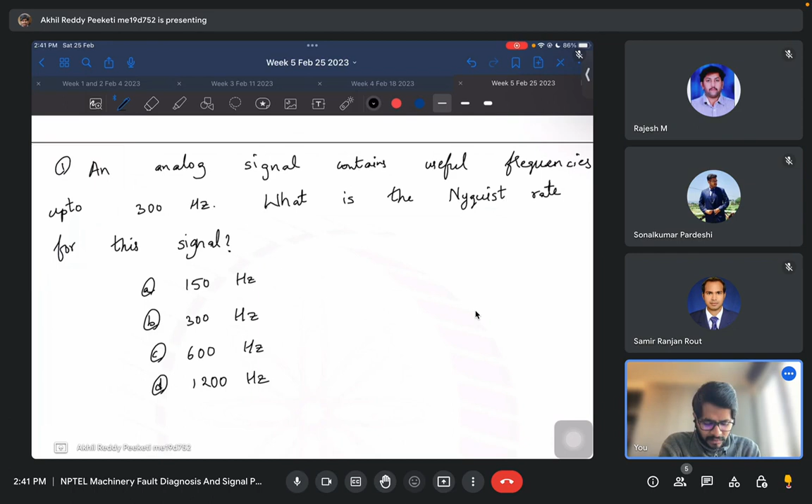So the first question: an analog signal contains frequencies up to 300 Hertz. What is the required rate of sampling for this signal? Can anyone give me the answer? This is one of the questions we have seen multiple times in the last weeks.

We have frequencies of up to 300 Hertz. So what should be the Nyquist rate? Nyquist rate is basically the sampling rate. What is the advised sampling rate for this case? Yes, 600 Hertz. So if the maximum frequency available is 300 Hertz, then you should sample at least 2 times the maximum frequency, right?

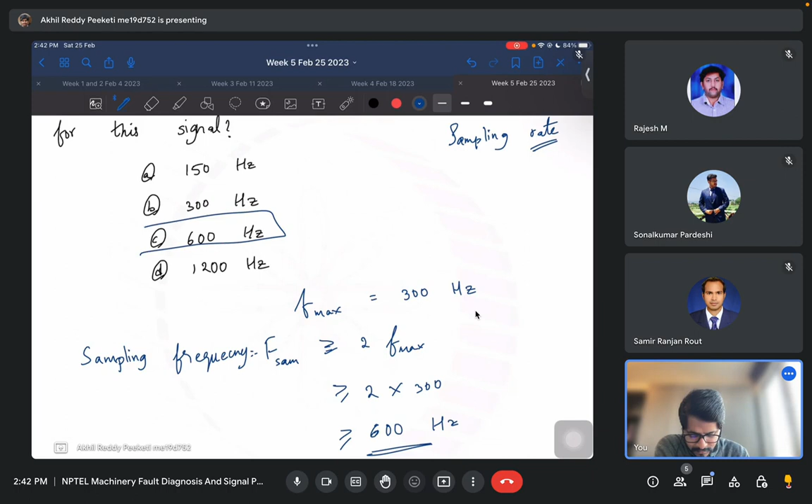600 Hertz. You can actually sample it at 1200 Hertz also, but the Nyquist rate corresponds to the minimum frequency at which you should sample. So here the answer is 600 Hertz. Even if you sample at 1200 Hertz, you will still be able to track all the properties of the signal, but you don't need to do it at that high frequency. If you just do 600 Hertz, that's enough.

That is for this question. I hope this is clear. So let's look at the second question.

An analog signal has useful frequencies of up to 240 Hertz. Suppose we sample at a rate of 600 samples per second. What is the highest frequency that can be represented uniquely? So we have a signal which has frequencies up to 240 Hertz, but we are sampling at 600 samples per second. Is that enough? 600 samples per second for 240 Hertz? Following the Nyquist rate or the sampling rate we know, is that enough?

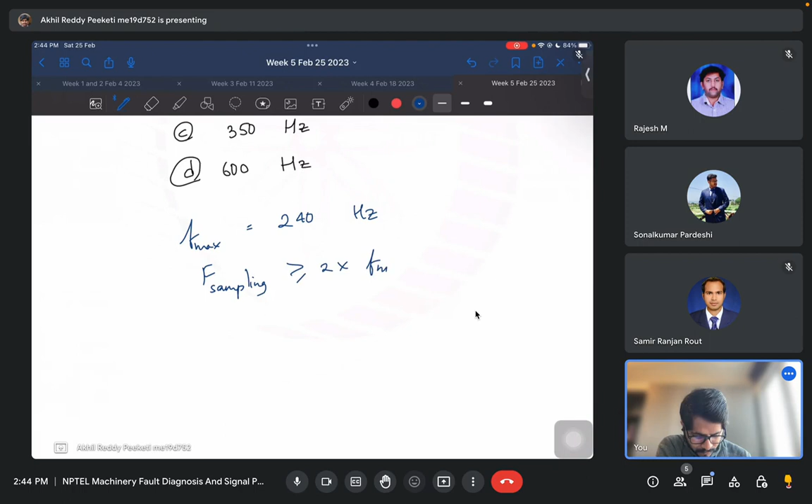You can unmute and answer anyone. For a frequency of 240 Hertz, is sampling at 600 samples per second enough? You need to sample only at 480 Hertz, that should be enough, but you are sampling at 600. So it is enough, right? 600 is greater than 480. So if you sample at 600 Hertz, that should be enough.

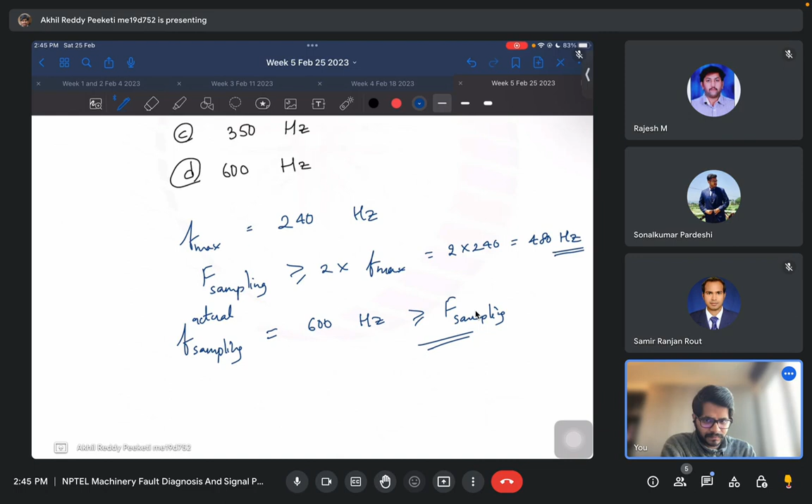Now let's say if you are sampling at 600 samples per second, what is the highest frequency that you can actually represent uniquely? For this sampling rate, what is the highest frequency possible? Any answer? So you are sampling at 600 Hertz. So anything up to 300 Hertz, 600 by 2 Hertz, you will be able to track, right?

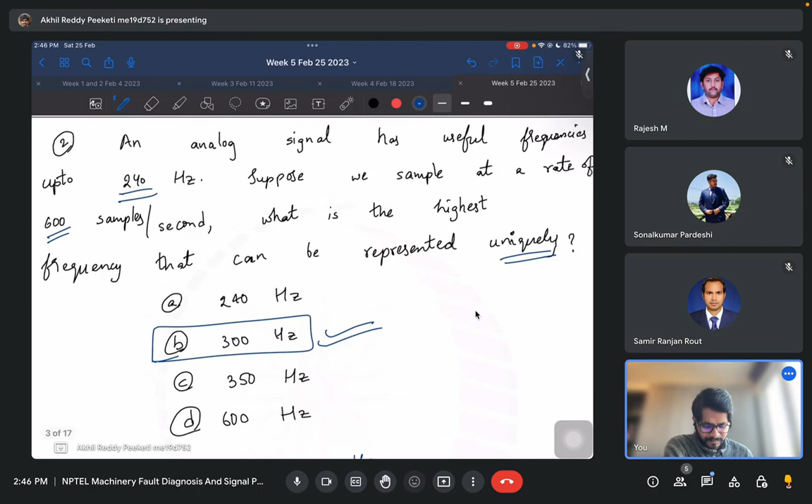Is this clear? Is this question clear? I hope so. So here this 240 Hertz data is just to deviate you from the correct things. The question is, what is the highest frequency that can be represented if you are sampling at 600 samples per second? So if your sampling rate is 600, then the maximum frequency you can get is half of the sampling rate, so 300 Hertz. I hope this question is clear to the others also.

Now let's move to the next question. Here we have a handheld accelerometer calibrator that provides 20 meters per second squared of peak vibration in terms of acceleration at a circular frequency of 2000 radians per second. Calculate the linear frequency and RMS amplitudes of velocity and displacement.

I'll wait for 1 or 2 minutes for all of you to read the question and understand it, and then I hope one of you can explain what we should do here.

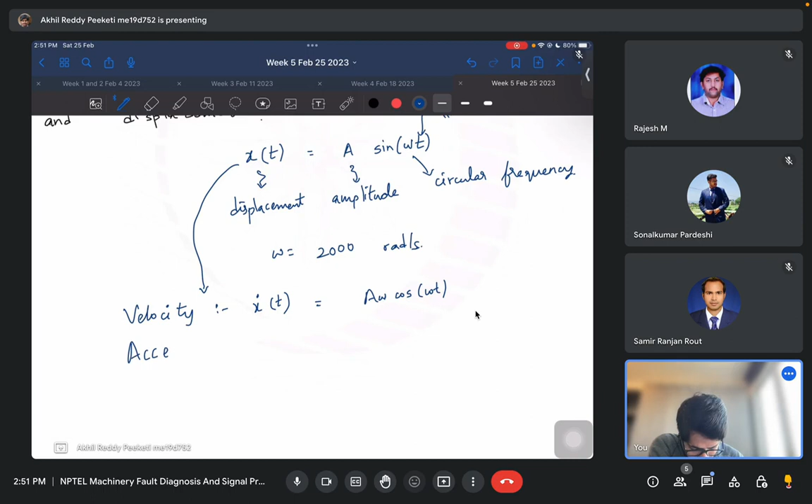If you do first derivative with time, then you will get velocity: A sin derivative is cos omega t, omega will come. And acceleration: cos derivative is minus sine, and omega will come again. So this is the acceleration amplitude, this is the velocity amplitude.

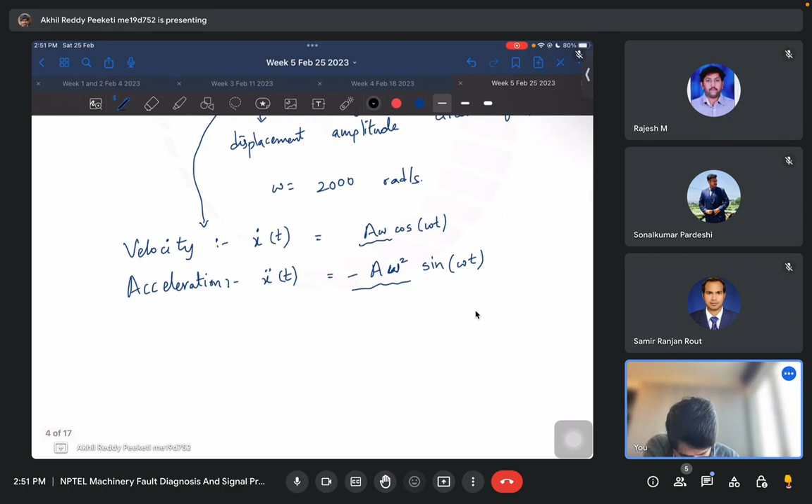Let's write those. Velocity amplitude would be A into omega, and acceleration amplitude would be minus A omega square, but if you are looking at the amplitude, only the magnitude is enough. So A omega square.

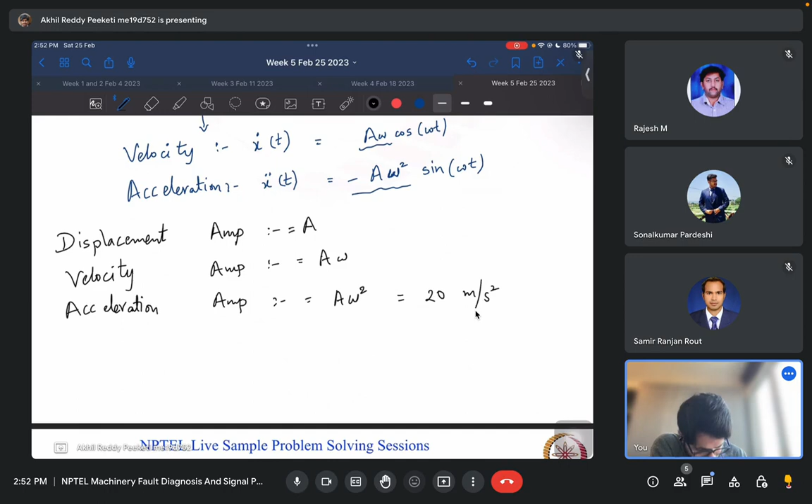Now they have given us the amplitude or the peak for the acceleration, so that means they have given us this. So we know omega and we know A omega square. So then can we calculate A? We can, right? So A omega square is 20 meter per second square

and A omega is 2000 radians per second. So A into 4 into 10 power 6 — radians squared is dimensionless, so second square gets cancelled. A is equal to 4, 5s are 20, so 5 into 10 power minus 6 meters. So A is equal to 5 micrometers. Now we got the displacement amplitude here.

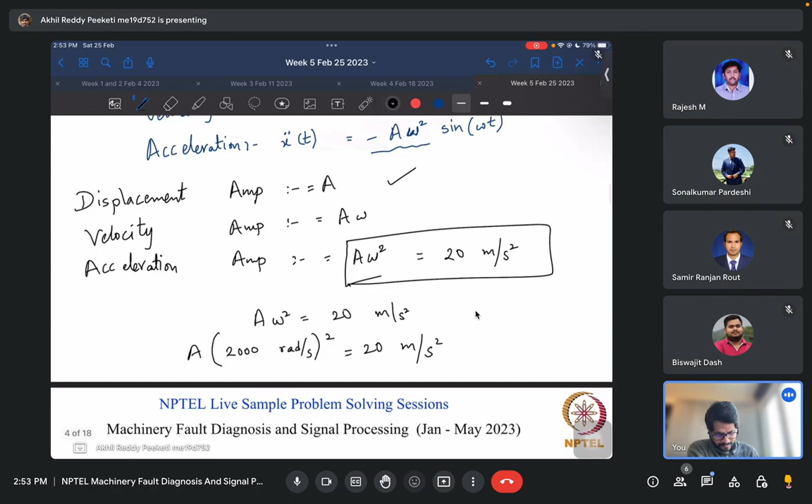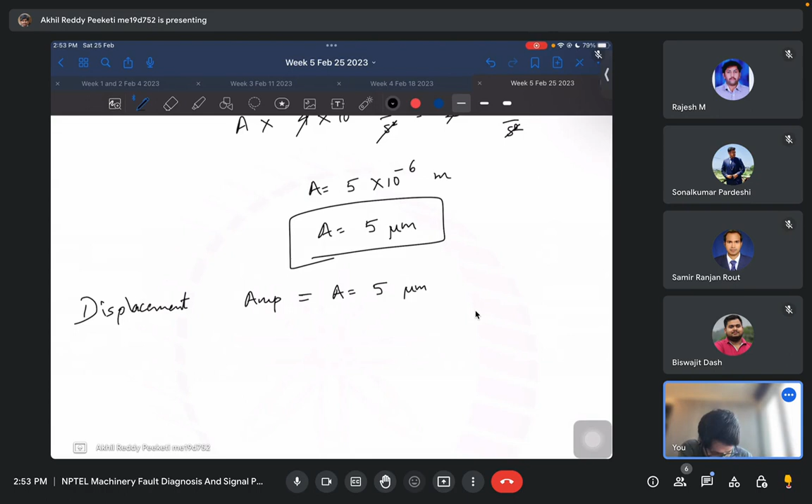What are we asked? We were asked to calculate the linear frequency and the RMS amplitudes. First let's calculate the normal amplitudes. Now we got the displacement amplitude, what would be the velocity amplitude? A omega, right?

5 into 10 power minus 6 meters into omega is 2000 radians per second. So 5 2s are 10, 10 power minus 6 into 10 power 3, so 10 power minus 3, so 10 mm per second. So we got the displacement amplitude and the velocity amplitude.

And first thing is linear frequency. So how is circular frequency and linear frequency related? The circular frequency is equal to 2 pi f, right? So this is circular frequency and this is linear frequency.

So f is equal to omega by 2 pi. Omega is 2000, by 2 into pi is equal to 1000 by pi, so some 318 point some hertz. So this is the linear frequency.

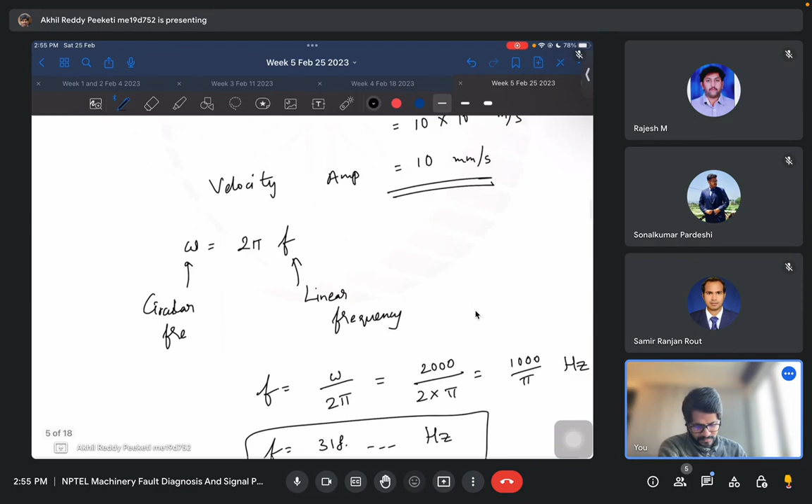Now we want the RMS amplitudes of velocity and displacement. So you know the amplitude, so what would be the RMS amplitude? Yeah, exactly. So RMS of displacement amplitude would be A by square root 2.

So 5 by square root 2, it's around 3.536 micrometers. Now similarly, RMS of velocity amplitude would be A omega by square root 2.

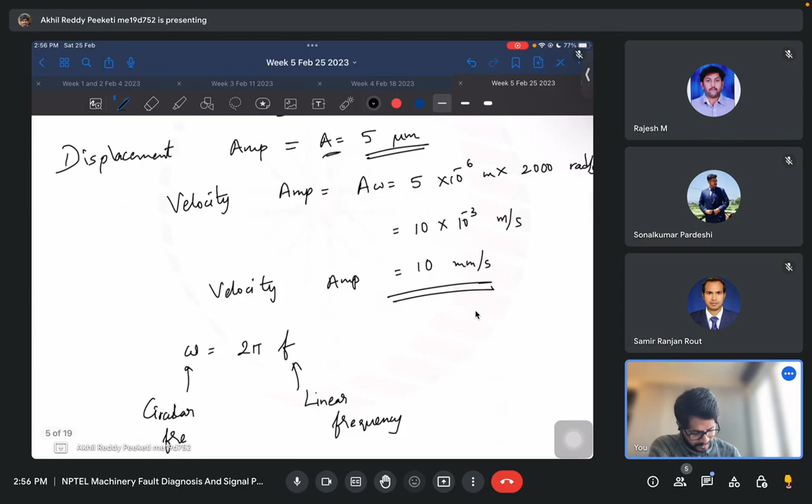Basically velocity amplitude by root 2, which we already calculated velocity as 10 mm per second. So 10 by square root 2 mm per second, so this would be around 7.07 mm per second.

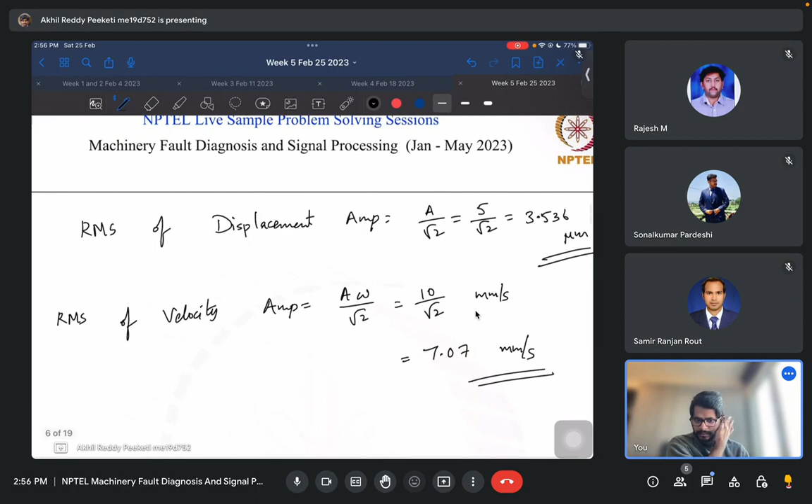So is this question clear now? How we calculated from whatever was given? So these questions you can basically assume, or you can look at this relation where displacement amplitude, velocity amplitude and acceleration amplitude are in terms of the displacement amplitude and the circular frequency omega.

So if you know these three formulas, which are just derived from A sin omega t, which you can also do if you have time, then you can solve these kind of questions. And for RMS, just divide amplitude by square root 2 to get the RMS. Is this clear?

So first, based on whatever was given, we calculated the displacement amplitude A and the circular frequency. From these two, we estimated the velocity amplitude as A omega and the acceleration amplitude as A omega square. So from that we got A, that is basically displacement amplitude. From this A and omega we calculated the velocity amplitude, and from omega we also got the linear frequency as circular frequency is equal to 2 pi f.

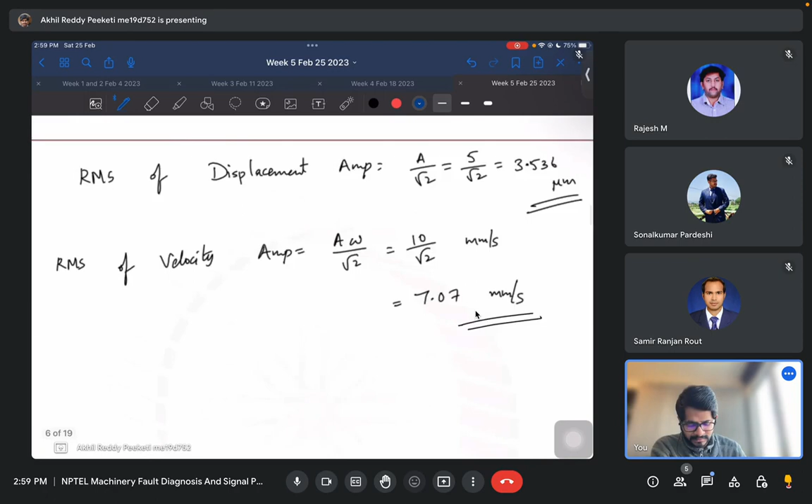So will you be able to estimate this question? I'll give you 2 minutes to work it out and then one of you can explain the solution. This is very similar to the last question, so the hint lies in these equations.

Is anyone able to come up with the solutions? Rajesh, you can unmute and speak.

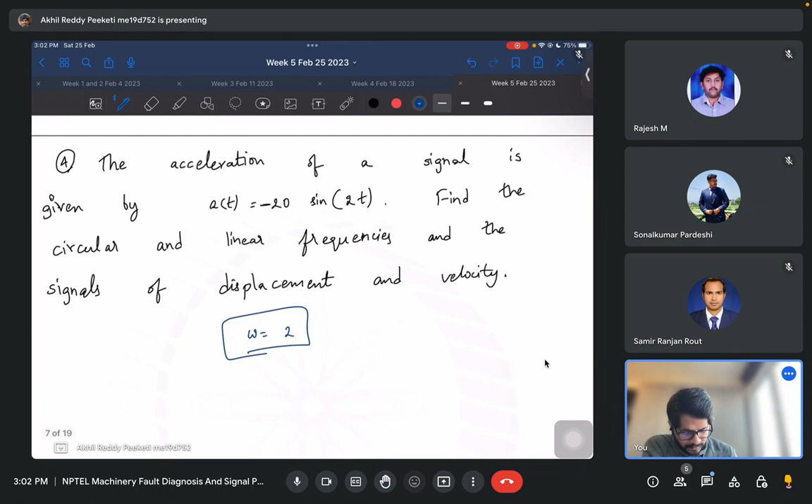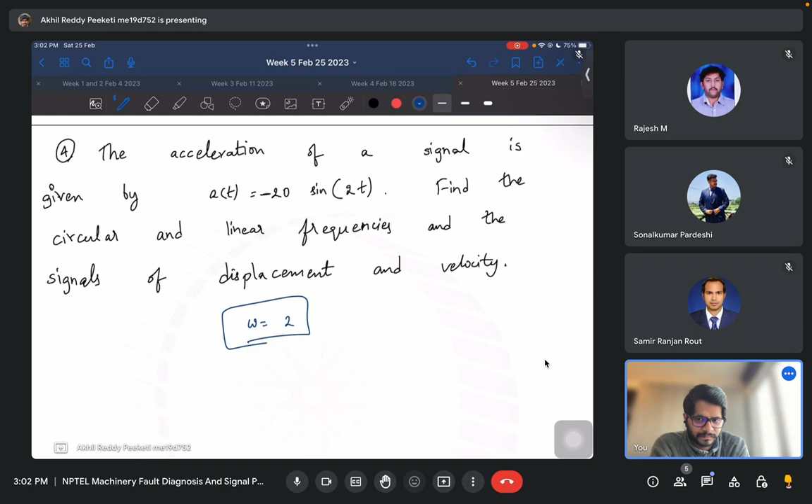Can you derive the signals of displacement and velocity? So in our last question, what we derived was if x of t is a sin omega t, then displacement is a sin omega t, velocity would be a omega cos omega t, and acceleration would be minus a omega square sin omega t. Okay, right? So this part is clear, right?

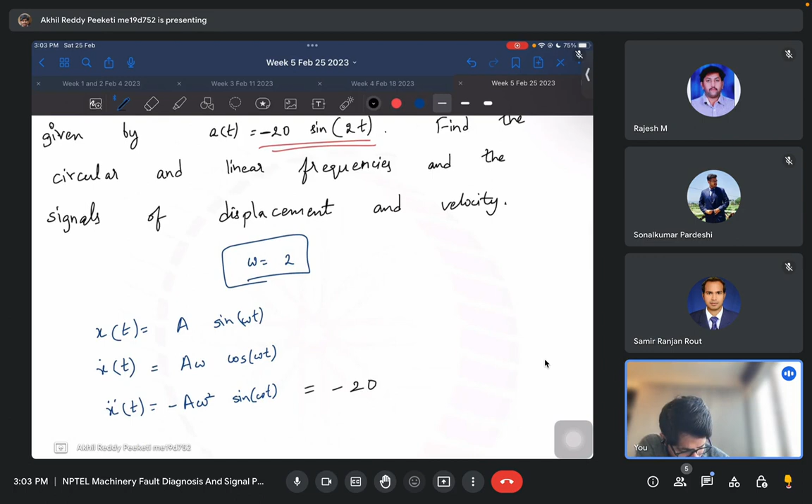Now they have given acceleration is equal to minus 20 sin 2t. So if you equate on both sides, a omega square is 20 and omega is equal to 2, right? So from these two, I'm just equating this to this, and omega here to omega. From these two, now we can get a into 2 square, 4, is equal to 20, so a is equal to 5.

Okay, so now we know a and we know omega. So now can we write the signals of displacement and velocity? So velocity signal is a omega cos omega t. So 5 into 2 into cos 2t is equal to 10 cos 2t. Okay. Now that is the velocity signal.

What about the displacement signal? It is a sin omega t. A is 5, so 5 sin 2t. So this is the displacement signal and this is the velocity signal, right? Now we have done this.

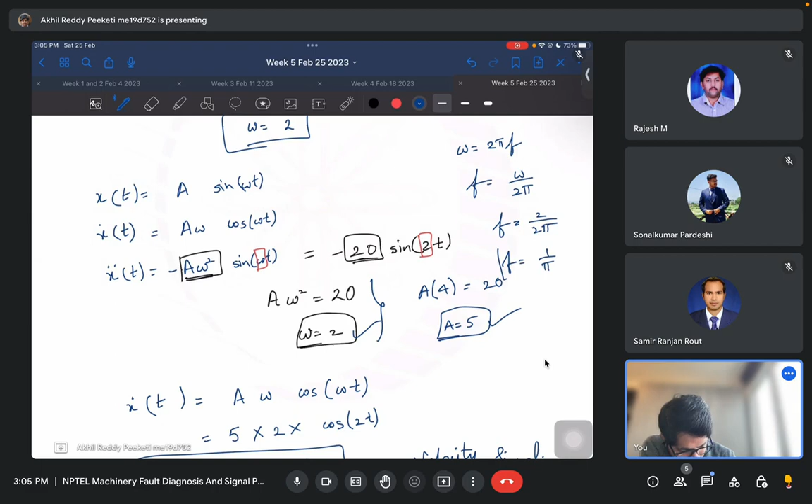What is the linear frequency? So omega is equal to 2 pi f, and f is equal to omega by 2 pi. So 2 by 2 pi is 1 by pi. Okay. So now is it clear? So based on only the acceleration signal, we estimated the signals of displacement and velocity, and the linear frequency also.

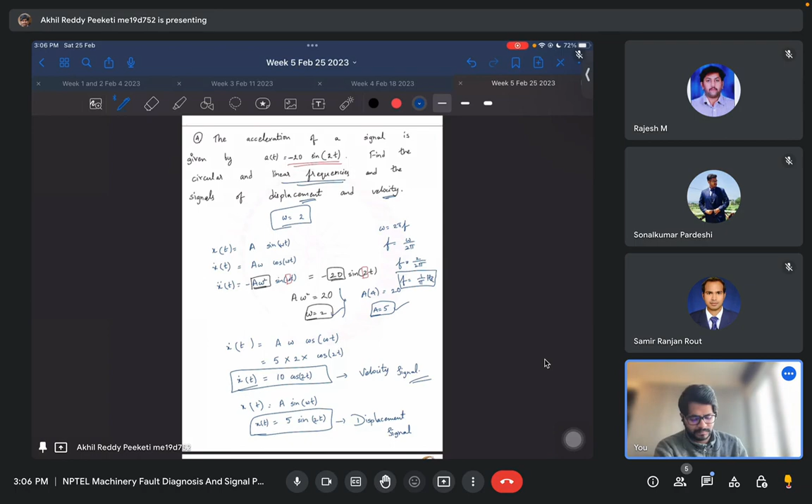So is this clear, how you can, if your signal is given, estimate the other corresponding signals? Similarly, if you are only given the velocity signal or the displacement signal, you can construct the other two signals and calculate the necessary terms. Okay, is this point clear? Yeah.

So let's move on to the next question. A pure tone signal of 1000 Hz is to be digitally acquired by a 16-bit computer DAQ, basically meaning data acquisition system. What is the minimum amount of onboard RAM required so that a frequency resolution of 0.1 Hz can be obtained?

So this is a little complicated question, looks like, but it's not. We have given the signal frequency and the type of storage system we are using, 16-bit. We are also given the frequency resolution. We need to estimate the onboard memory needed. Onboard memory is basically how many total bits or bytes you need to store. If we know that, then we can tell the memory space, storage space required, right?

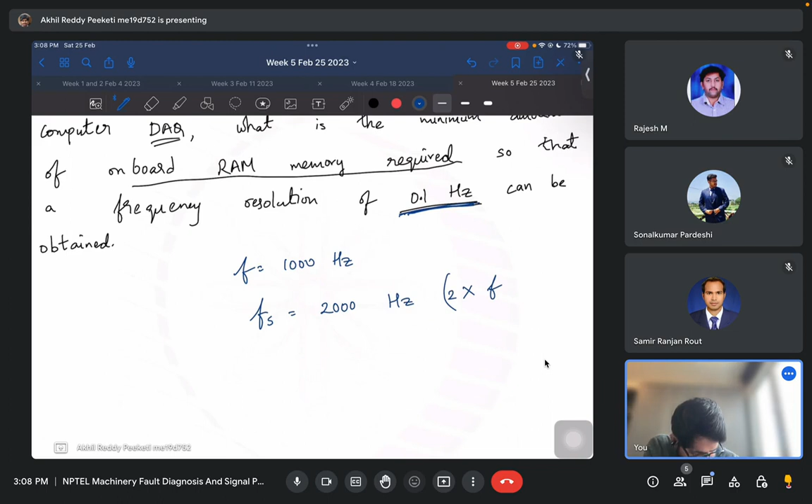Because the signal has 1000 Hz, you need to sample it at at least 2000 Hz frequency, right? That's the sampling rate. Okay, now if this is your sampling rate, then what is your time between each sample? Let's say this is the signal you are sampling. What is the sampling time interval? It is the inverse of the sampling frequency, right?

So frequency is the inverse of the time. Here the sampling interval is the inverse of the sampling frequency.

Now we know the sampling rate. Now we need to know the total time which we are sampling for. So to do that, let's say t is the total time we are sampling, that should be equal to the number of data points which we are sampling into the time interval, right?

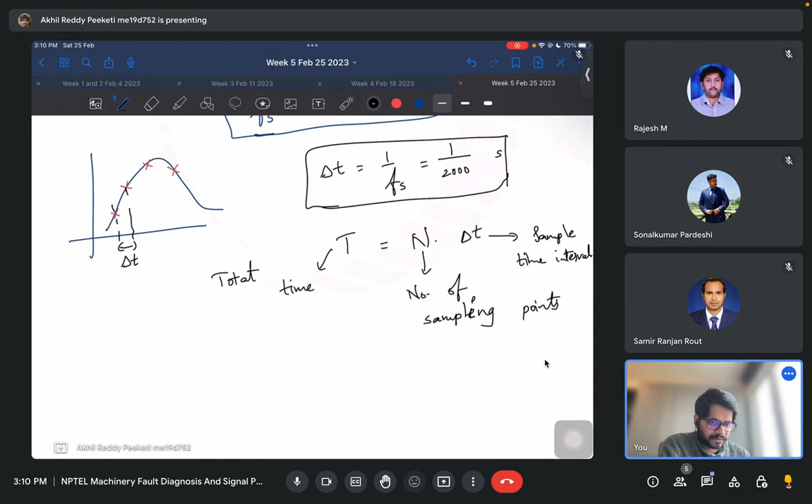So this is total time, this is number of samples or sampling points, and this is the sample time interval. Now we need to know the total number of sampling points to get to the storage. So how will we get the total time?

Here there is one more data given, that is the frequency resolution. So the frequency resolution is actually the inverse of the total time, which is given as 0.1 Hz here. So this means t is equal to 1 by 0.1, which is equal to 10 seconds.

So you are doing a sampling every 1 by 2000 seconds for 10 seconds. So then your total number of data points would be t by delta t, which is 10 by that, equal to 20,000 points. Now you have 20,000 points, and to get to the storage, now you need to look at the type of storage system.

So here it is given 16 bit. So one point uses 16 bits. That is equivalent to, if you write it in bytes, 16 by 8 bytes, as 1 byte is 8 bits. So this is equal to 2 bytes.

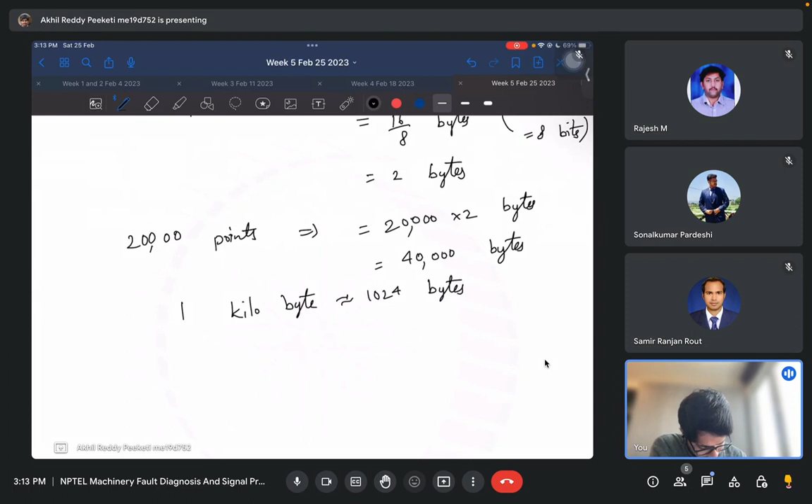And 1 kilobyte is actually 1024 bytes. So if you convert that, 40,000 by 1024 kilobytes, it's almost 39 kilobytes. So this is the amount of RAM needed to store this total sample.

I will repeat again once. So what we are given is the maximum frequency in the signal, and the type of storage we are using, and the frequency resolution. So to get to the amount of storage you need, first you need to find the total number of data points you need.

So amount of storage is a function of type of storage and number of data points. Now type of storage they have given as 16 bit, and number of data points you don't know, you need to estimate that. Now to get the number of data points, you need the total time during which you are taking the samples.

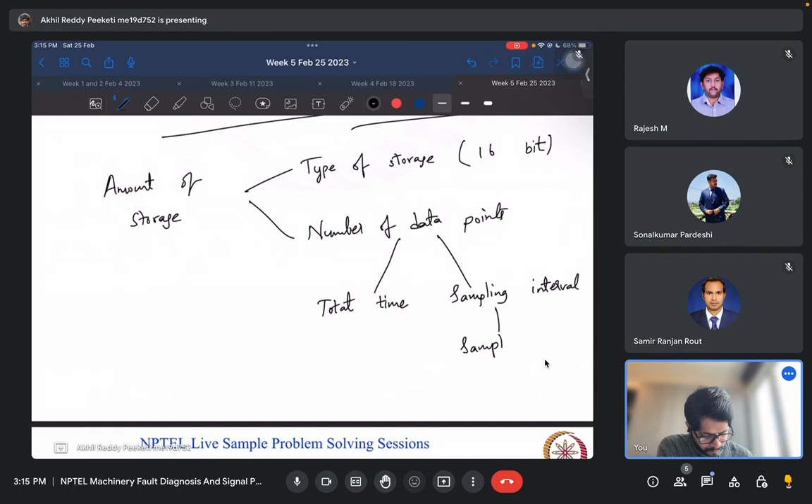and what is the sampling interval. So this ratio will give you the number of data points. Now sampling interval you don't know, so that is also a function of the sampling frequency, which you can estimate from the maximum frequency of the signal.

Now how will you get the total time? So the total time you can estimate from the frequency resolution that is needed. So in the question they have given the type of storage, the maximum frequency in the signal, and the frequency resolution. So from these three we have calculated the amount of storage.

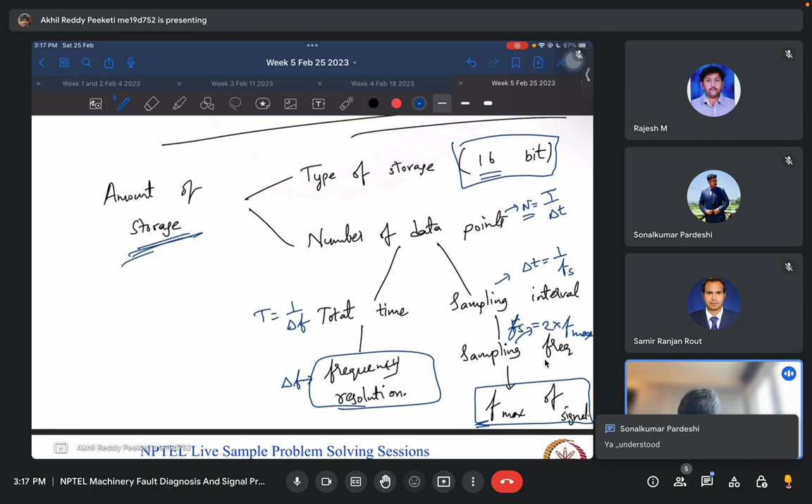From the total time and the sampling interval, we got the number of data points. And from the number of data points and the type of storage system, we got the amount of storage needed. So that is what we did in this question.

So: maximum frequency in the signal, type of storage, and the frequency resolution. First sampling frequency, sampling time interval, then number of sampling points, and from the frequency resolution, the total time period, and from these two, the total number of sample points, and then the storage. And the storage also, first from bits we converted to bytes, and from bytes again to kilobytes. This way you can estimate how much storage you need for the computer you are using for the acquisitions.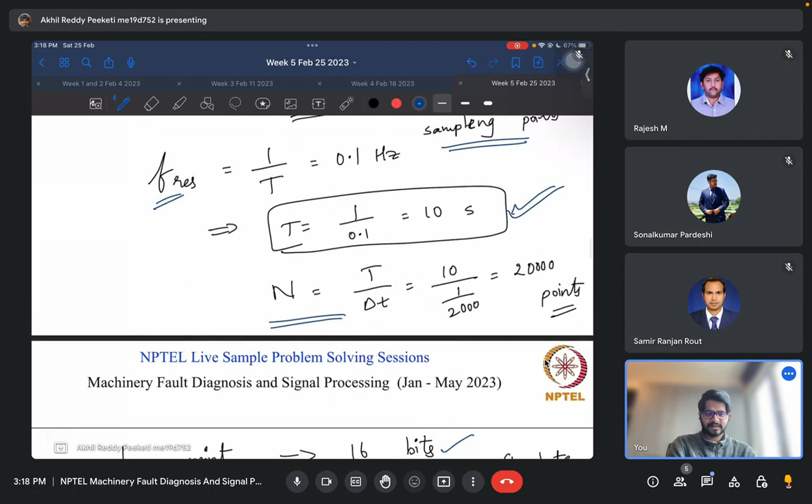So this is a very simple example where you need only 39 kilobytes, but this is only for 10 seconds. Let's say you are doing this test for hours, then based on that the storage also you need to increase. So I hope this question is clear.

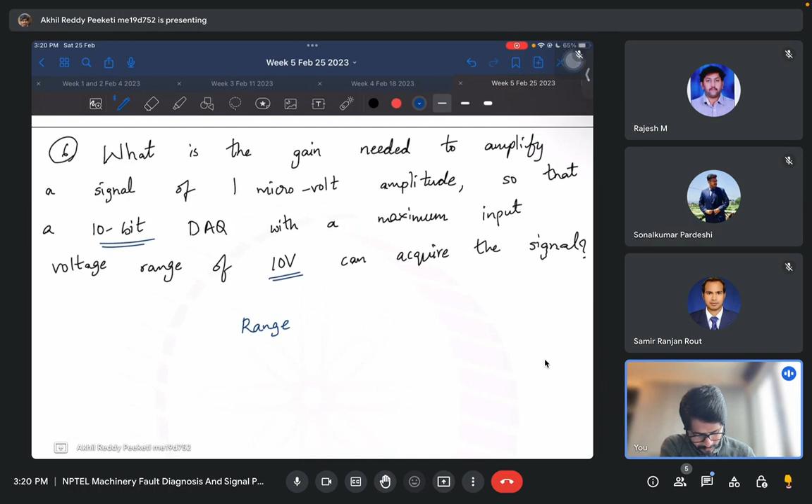So first let's calculate the resolution for this system. Range is 10 volts and it's a 10-bit storage system. So what is the resolution? We did this last week, I think. It's range by 2 power n, right? So 10 by 2 power 10. So resolution equals 10 by 1024, that is 2 power 10.

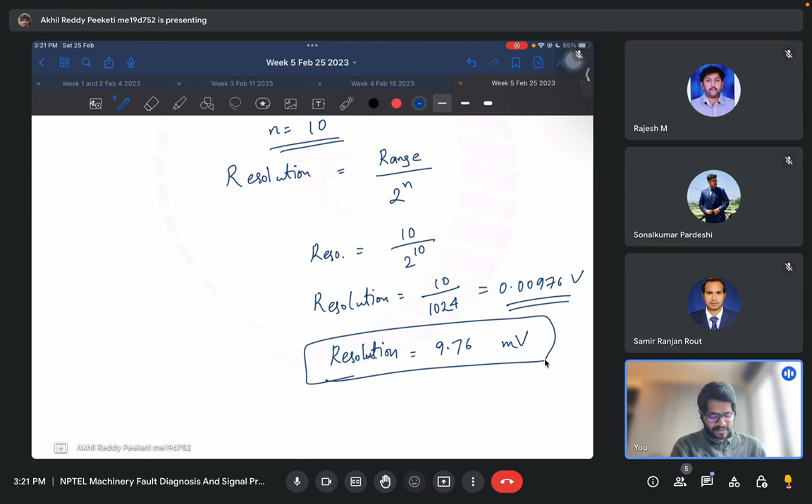So it's equal to 0.00976 volts if you calculate. Now this is the least amount of signal, so if we convert this, it would be 9.76 millivolts. So this is the least amount of signal that we can actually capture in the system.

But the signal is only 1 microvolt. So 1 microvolt is 10 power minus 6 volts, and our resolution is 10 power minus 3 volts. So this is actually much lesser than the resolution, so we can't actually track this signal.

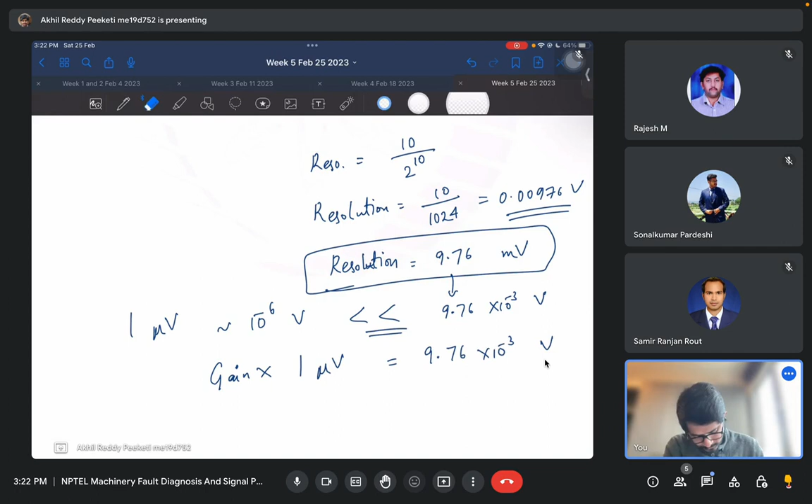So if you need to do that, you can multiply it with some gain so that it is equal to the resolution, and then it can be tracked. So is this clear? If you take this microvolt signal and amplify it — this gain is basically the amplification factor — amplify it 9.76 into 10 power 3 times, then you can track that signal with your data acquisition system.

Okay, is this clear? How to calculate the gain when you know the resolution and the least amplitude that you need to track? So first, based on the storage type and range, we calculated the resolution, and then we multiplied our signal with some gain so that it is equal to the resolution. Then we can calculate the gain. Okay, is this clear?

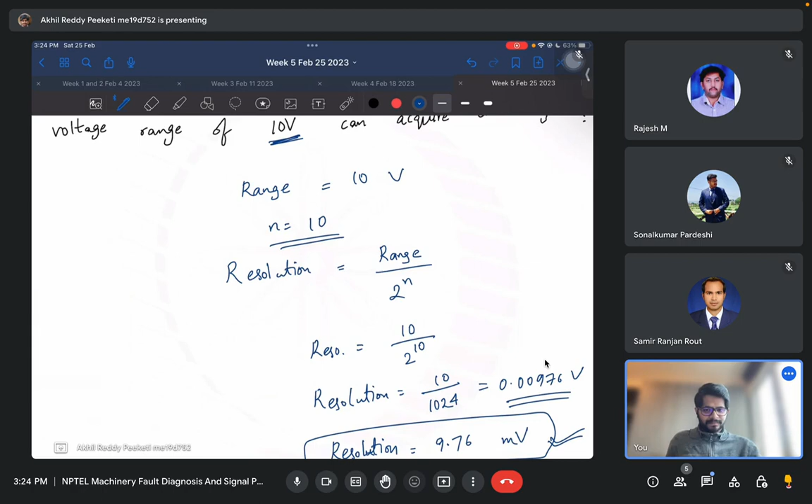Let's look at a simple example like this. So your actual signal is only like this, let's say. Anyway, I'll just explain it again. Let's say this is your actual real signal, but your data acquisition system can take in this resolution only.

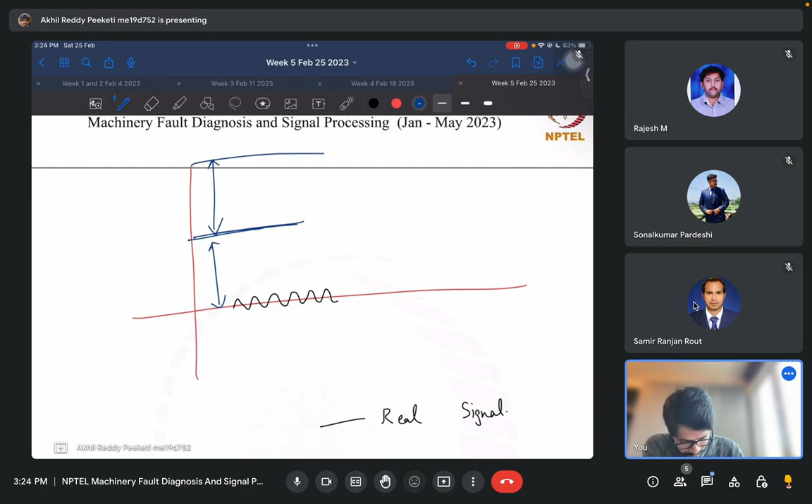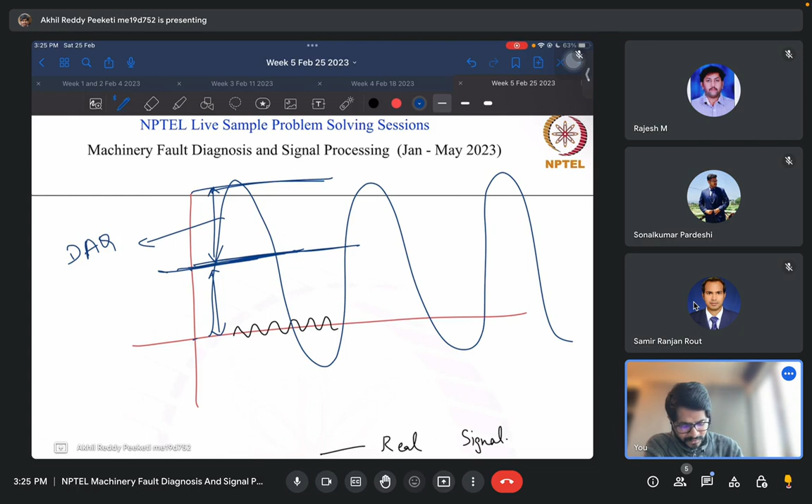So anything above this level only gets recorded. So only signals like this get recorded in the DAQ system. But your real signal is very small amplitude. So what you do is you multiply this with some gain factor.

So real signal into gain, so that this becomes like this — higher magnitude — so that you can actually track it. So that is the gain. So the minimum value is the resolution, so that the signal should be equal to the resolution after multiplying it with gain. Okay, so next let's move on to the next question.

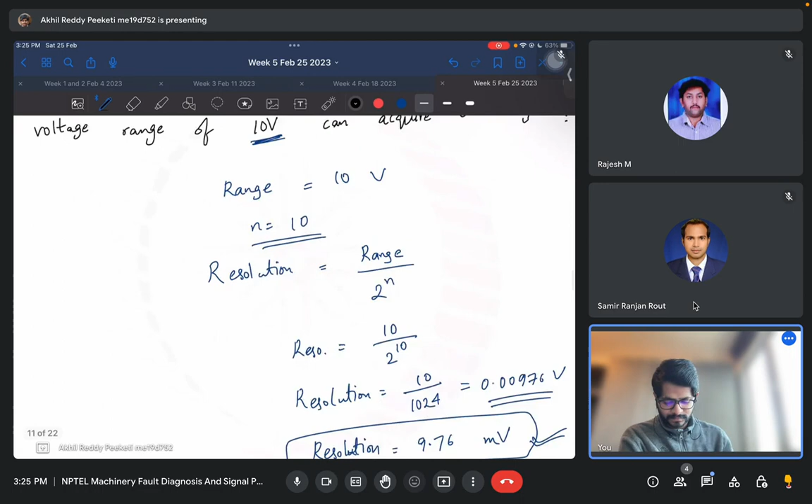Yeah, I think we have a question that comes and we will discuss that. We have a question similar to that. Okay.

For a DAQ system with a gain of 10,000 and a resolution of 0.2 volts, what will be the minimum magnitude of signal that can be detected? So we have the gain and we have the resolution. Now the question is, what is the minimum magnitude of signal that you can detect with this gain and with this resolution? What's the answer?

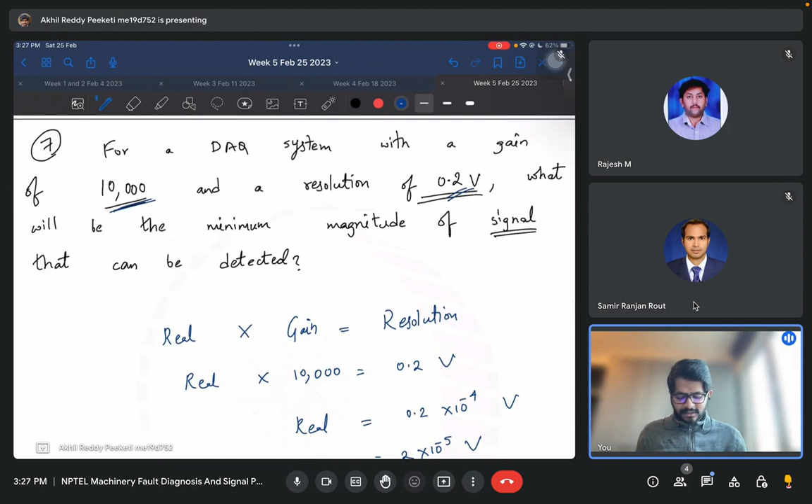Right, so the real signal we don't know. Gain is given as 10,000 and the resolution is 0.2 volts. So what would be the real signal's amplitude? 0.2 into 10 power minus 4 volts, so you can write it as 20 microvolts. So previously you could only detect a 0.2 volt signal, but with a gain of 10,000 you can actually detect a signal of 20 microvolts.

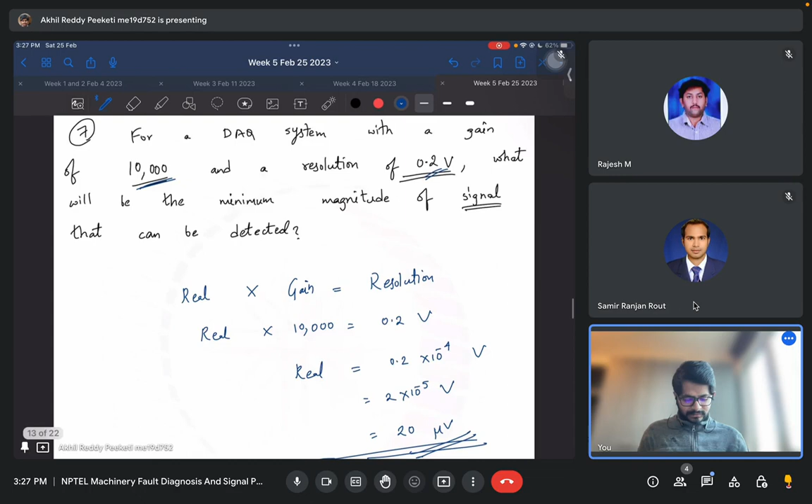Okay, so this is similar to the last question, but here we are calculating the minimum magnitude of signal we can detect. I hope this question is also clear. Now let's go to the next question.

Rajesh, that bitrate question is there, we will discuss it there. Okay.

Now, are the questions still now clear? How we calculate the gain and how to use the gain and resolution?

Next question: how many factors will the new resolution be of the old one by using a 12-bit memory card instead of a 10-bit memory card? Can you answer this question, anyone — Samir or Rajesh? First, what would be the new resolution?

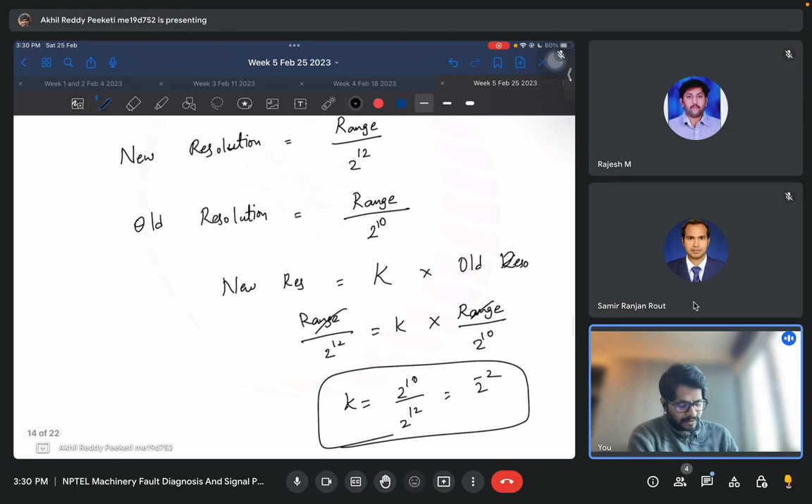So for the new one, range by 2 power 12, and in the old case it is range by 2 power 10. So they are asking how many factors the new resolution will be of the old one. So new resolution equals k into old resolution factor. So range by 2 power 12 equals k into range by 2 power 10. So k equals 2 power 10 by 2 power 12, so 2 power minus 2. So the new resolution would be 2 power minus 2 times the old resolution.

Is this clear? So 2 power minus 2 times means basically 1 by 4. So if the old resolution is 1 volt, the new resolution would be 0.25 volts, better than the old one. I hope this is clear.

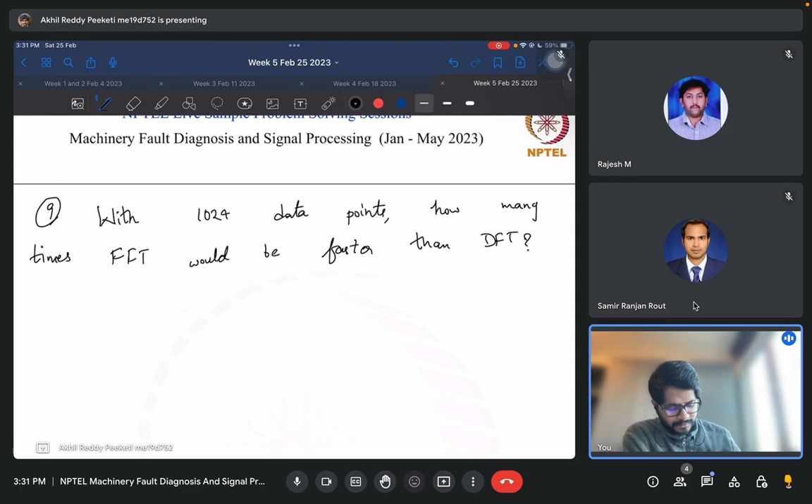Next question: with 1024 data points, how many times would FFT be faster than DFT? You guys remember this question from last week or the previous week also, I think.

What is the number of operations needed by DFT? Order of n square, right? But FFT you only need order of n log 2n. So in DFT you need to perform 1024 whole square, but in FFT you perform only 1024 into log 2 of 1024. This is almost 10 power 3 whole square, so 10 power 6. This is 1000 into log 2 of 1024, which is log 2 of 2 power 10, so 1000 into 10, so 10 power 4. So in FFT you need only 10 power 4 operations, but in DFT you need 10 power 6 operations. So FFT would be 100 times faster, right?

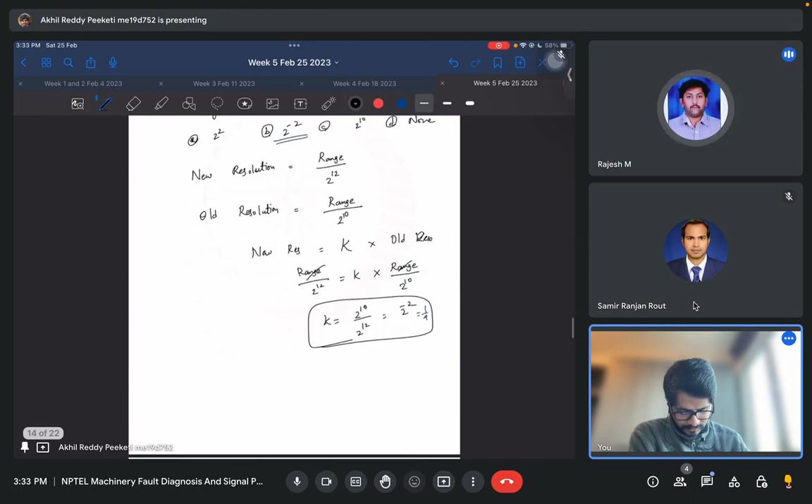Let's move on to the next question. A signal given x equals 10 cos 200 pi t is to be captured. A minimum resolution of 10 millivolts must be the least count. What will be the optimum bit size and the sampling rate for the DAQ? So they are asking what should be the storage system type for this resolution and for this signal.

I'll give you maybe 1 minute to think of an answer. We know that bit size, resolution and the range are related, right? So we need to use that relation to come up with the bit size. Maybe I'll give you a minute to think and try solving it.

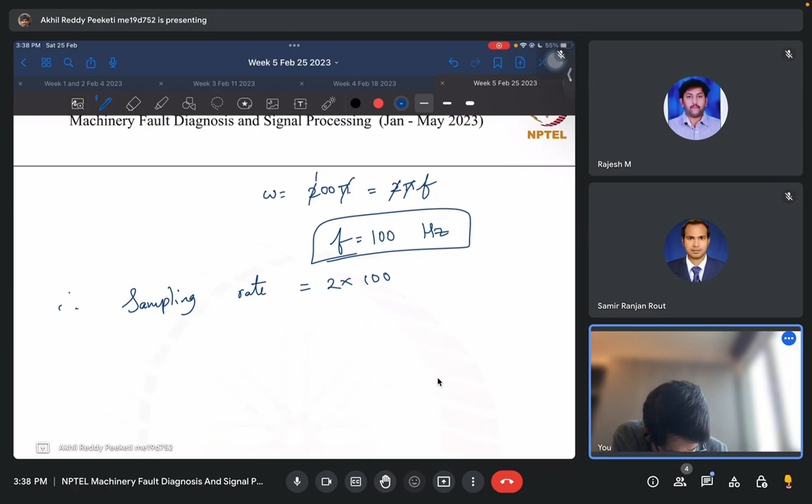Next, what is the sampling rate? Based on the frequency we can estimate, right? So omega is given as 200 pi, which equals 2 pi f. So f equals 100. So the frequency of the signal is 100 hertz. So what should be the sampling rate? 2 into 100, right? Is this clear? From the signal and the resolution, based on the range, we calculated the bit size and then the sampling rate also. Okay, let's move to the next question.

A discrete time signal x of n is equal to 10 sine pi n by 10 is quantized with a resolution of 0.02. How many bits are required in the analog to digital converter in each case?

Again, I think a similar question, and I'll give you guys 2 minutes to try to solve it, and then maybe if possible can you tell the answer.

So here also range and resolution are given. Now we need to calculate the number of bits.

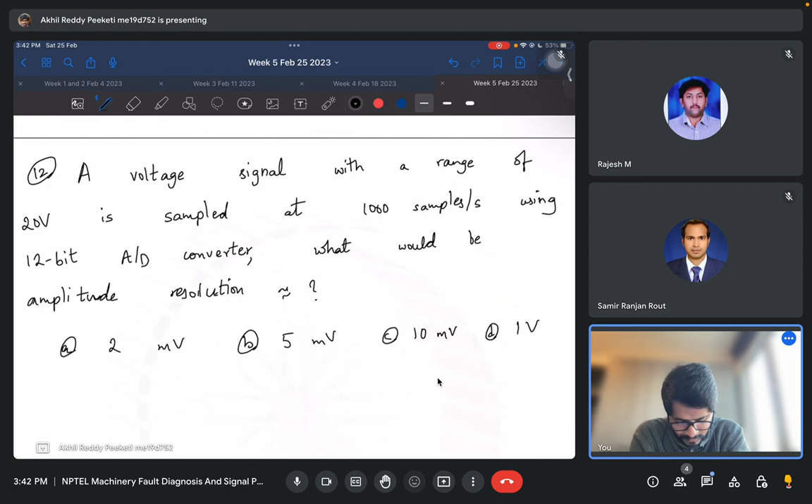Next, a voltage signal with a range of 20 volts is sampled at 1000 samples per second using a 12-bit analog to digital converter. What would be the amplitude resolution?

So this week we have many questions on resolution. So range and the storage is given. So I think the resolution would be pretty straightforward, right?

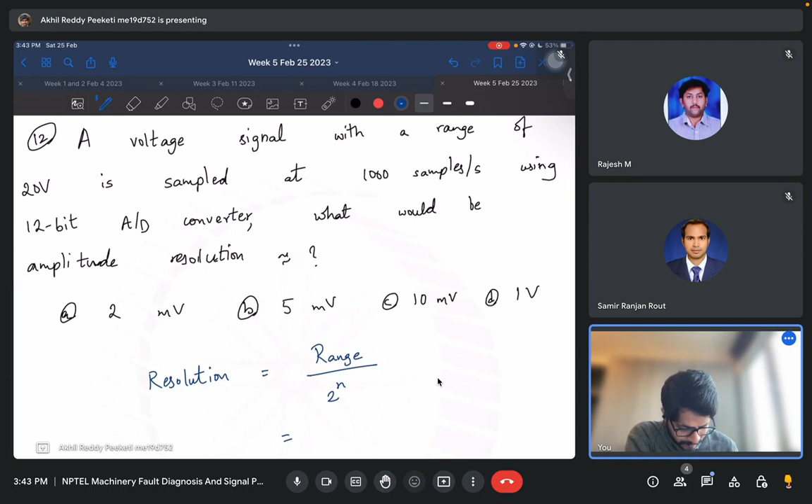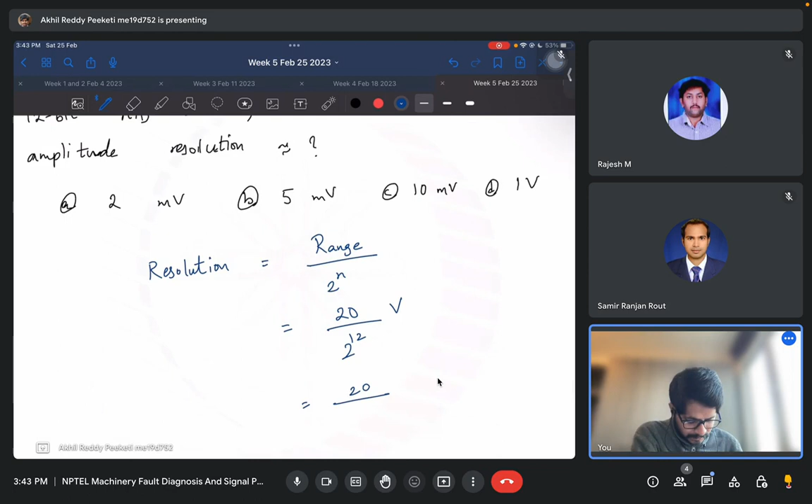So resolution is equal to range by 2 power n. So range is given as 20 volts and storage is 12 bit. So 20 by 2 power 12, which is 4096, I think. This turns out to be 4.88 millivolts. So the closest option here is 5 millivolts.

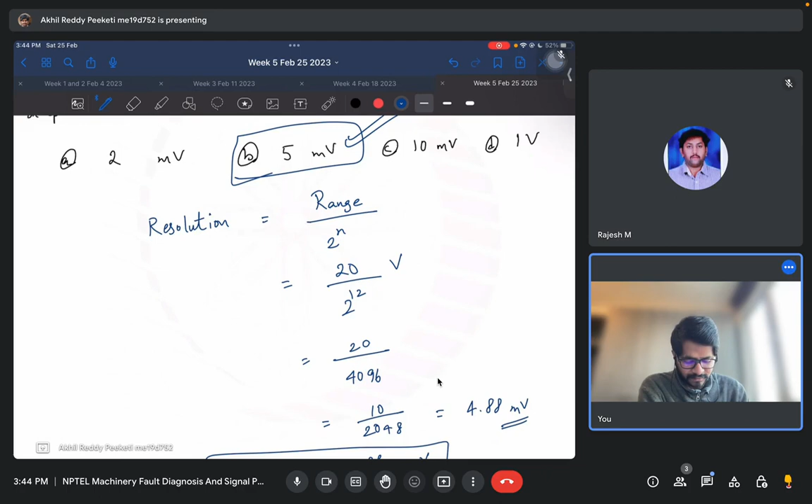Okay. So I think by now you should be able to answer such questions on resolution, range, or if you are asked to calculate the storage system or the resolution or anything like that.

Yeah, this is the question which you are asking about bit rate. So exact same question, but here we are being asked the bit rate. So this bit rate is basically when you are sampling the data, that data should be transferred to the data acquisition system. So the wires which are connecting, or the transmission system, whatever, wired or wireless, should be capable of sending that much data speed with that speed.

So you are sampling 1000 samples per second, every second, and each sample takes 12 bits because you are using a 12-bit storage system. So then how many bits you are racking up per second? 12,000 bits per second, right? So this many bits per second you should be able to store and transfer. So that is the bit rate. Is that clear, Rajesh?

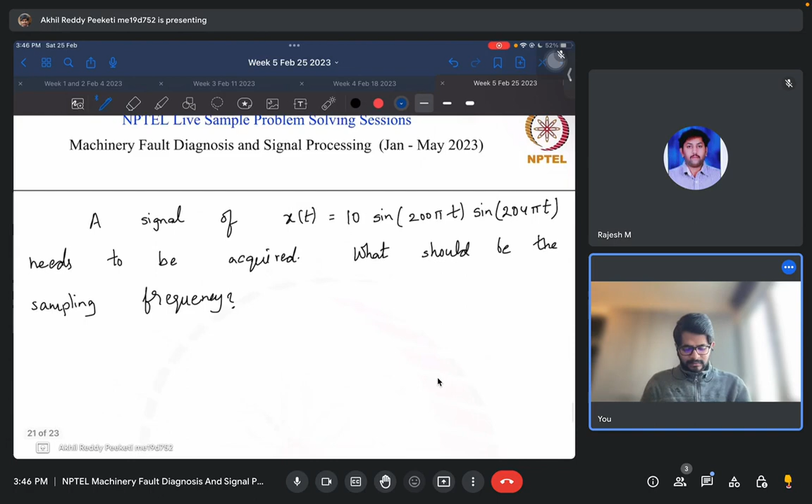Now let's do the next question. A signal x is equal to 10 sine 200 pi t into sine 204 pi t needs to be acquired. What should be the sampling frequency? So for this case, what should be the sampling frequency?

Rajesh, can you tell the answer? What should be the sampling frequency here? First, what are the frequencies that are present here? So this is 100 hertz, and the second is... so what should be the sampling frequency?

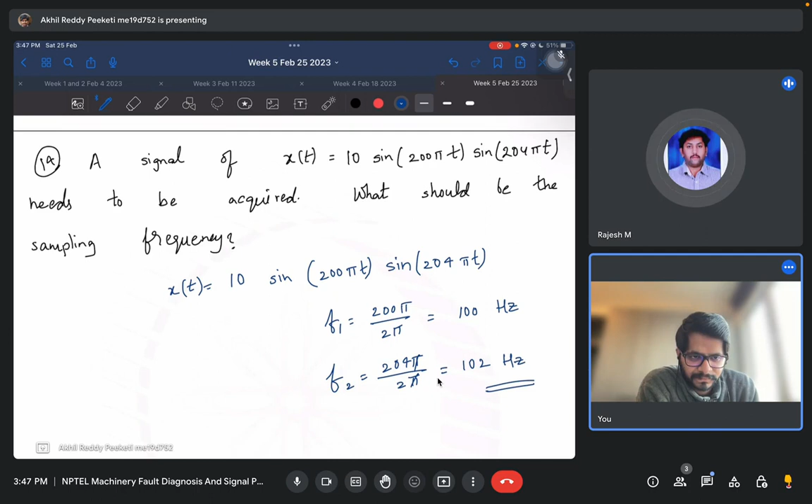Yes, but uh, so that is actually wrong because you have two sines multiplied, right? So because of that, you can actually write this signal using this formula. Cos of a minus b minus cos of a plus b. So cos of a minus b is cos a cos b plus sin a sin b, minus of cos a plus b is cos a cos b minus sin a sin b. So this actually gives cos a cos b plus sin a sin b minus cos a cos b plus sin a sin b.

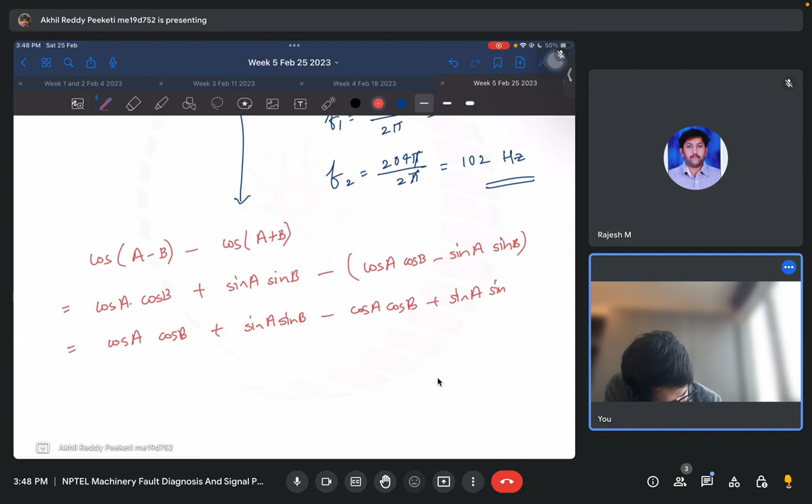So this gives 2 sin a sin b. So you see we have sin a sin b, right, of that form. So that you can actually write this way. So if you write that 10 sin...

200 pi t sin 204 pi t is equal to 5 into 2 sin 200 pi t into sin 204 pi t. So this is A and this is B, right?

So how can we write this? 2 sin A sin B in terms of cos we can write, right? So cos of 200 pi t minus 204 pi t minus cos of 200 pi t plus 204 pi t. So this becomes cos of 200 pi minus 204 pi, so minus 4 pi t, minus cos of 200 plus 204, so 404 pi t.

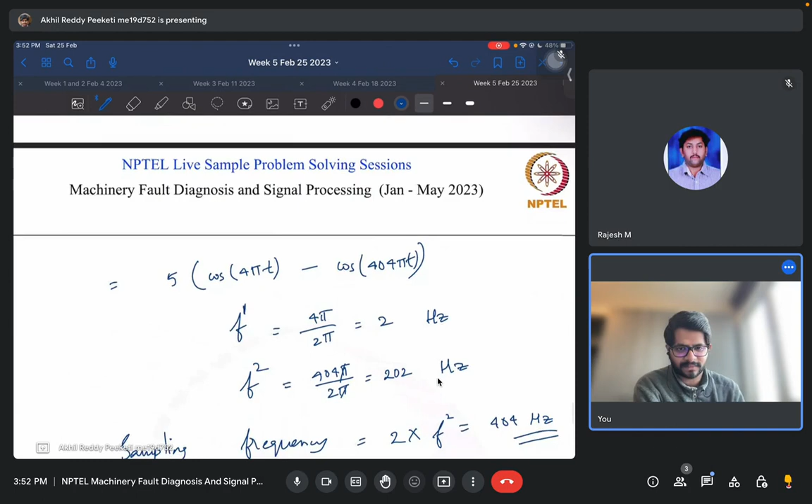Now what would you say as the sampling frequency? See, this is a tricky question. Whenever you see sine or cos multiplied, you shouldn't directly take the frequencies from them. You should actually convert them to this addition or subtraction format and then see the maximum frequencies. Is that clear?

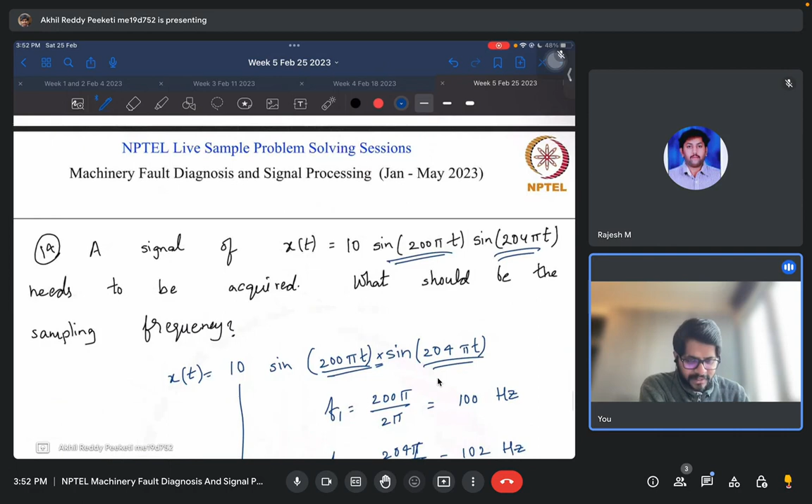So this kind of mixing signals by multiplication is a form of mixing signals called heterodyne. So in that they actually use this only to get some unknown frequencies or to get two different waves. So basically this is from 200 and 204 frequencies which you got.

404 and 202 and 2. Basically what I am saying is, let's say you have two systems which can generate 100 and 102 hertz signals. From those two you are able to generate 2 and 202, even though you don't have the corresponding signal generators, by mixing those two signals.

So yeah, this is the sampling frequency in this. Okay, let's look at the next question.

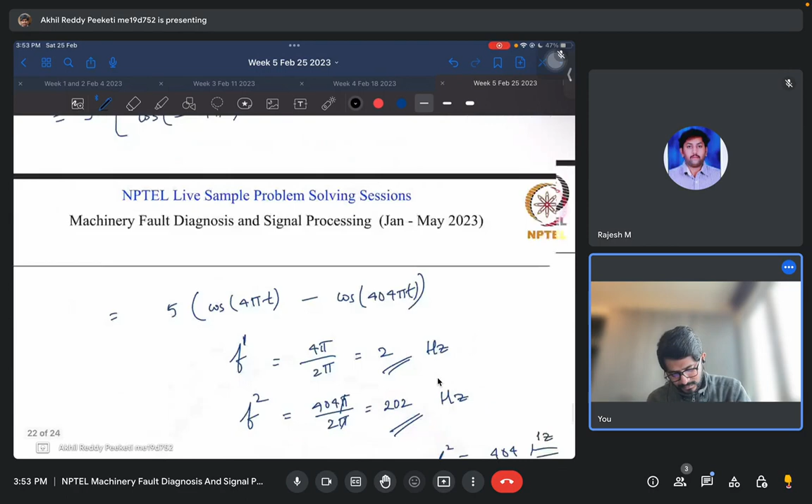The mixed signal in the signal heterodyne has frequencies of 1002 hertz and 2 hertz. And one more thing to see here is, so basically a minus b and a plus b, right? So we can write, let's say, a sine 2 pi f1t into sine 2 pi f2t as a by 2 into cos of 2 pi f1 minus f2t minus cos of 2 pi f1 plus f2t.

So you don't need to do all the derivation, you can just in these cases say the maximum frequency is f1 plus f2, so the sampling rate is 2 into f1 plus f2. You can directly do like this.

Okay, so here they have a mixed signal using this heterodyne principle which we just did, has frequencies of 1002 and 2 hertz. Now if the frequency of a known signal is 500, what is the frequency of the unknown signal? So they are saying, after mixing the signals, they got 1002 and 2 hertz. So after mixing, what are the frequencies that you will get? f1 plus f2 and f1 minus f2, right?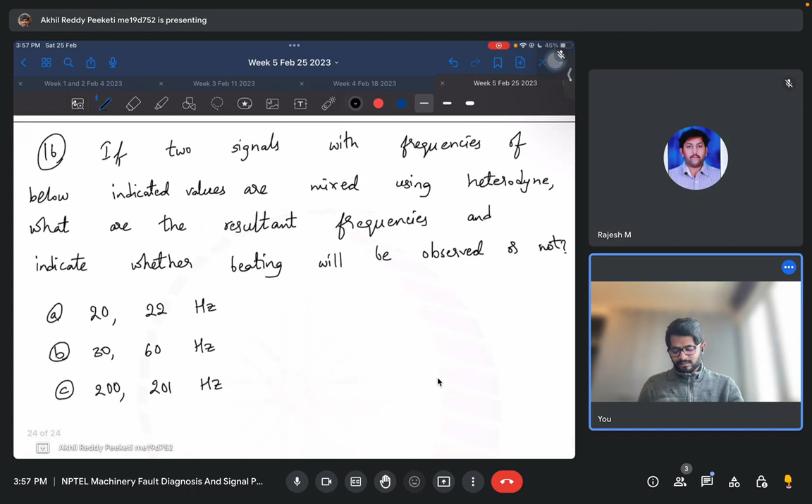If two signals with the frequencies of the below indicated values are mixed using heterodyne, what are the resulting frequencies, and indicate whether beating will be observed or not? Okay, this is the last question.

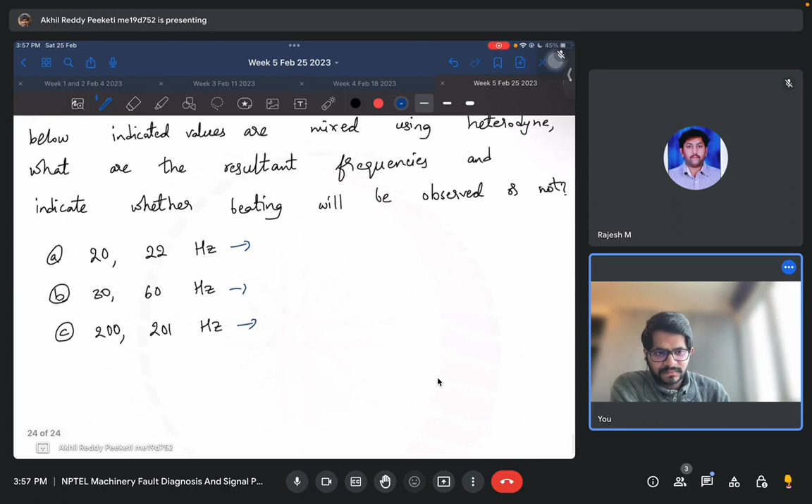So what will be the frequencies which we will see if we mix these two frequencies? If we mix 20 and 22, what should be the frequencies? First their sum will come, right? F1 plus F2 and F1 minus F2. These are the two frequencies which we will see in the heterodyne, right?

So we will see 20 plus 22, 42, and 20 minus 22, 2 hertz. Right, Rajesh?

Yeah, so in the next case, 30 and 60 hertz. So then we will get 30 plus 60, 90, and 30 minus 60, absolute value, so 30 hertz. Okay, now if you mix 200 and 201, you will get 401 and 1 hertz. So these are the frequencies which you will get when you mix these two signals.

In these three, which do you think will show beating? Yeah, this will show beating. What about the first one? So there also they are very close, right? 20 and 22, so this also will show beating. But these are very different, so this won't show beating.

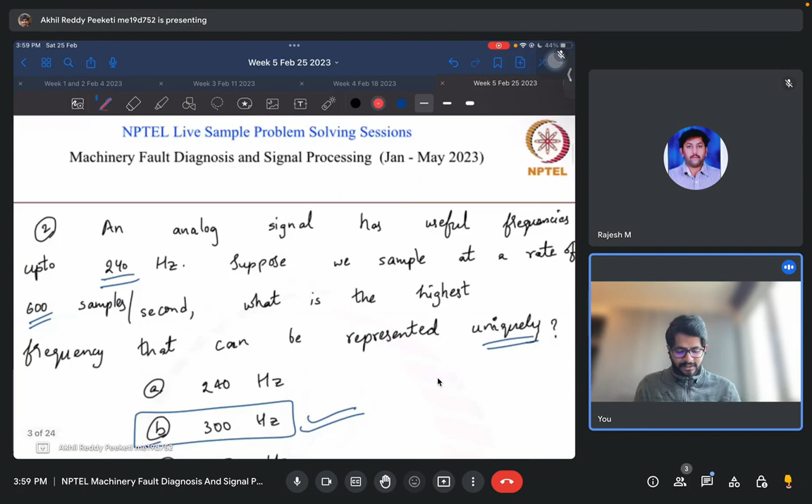Okay, I'll just revise once and then we can close the session. So in the first question, we looked at the sampling frequency based on the maximum frequency in the signal.

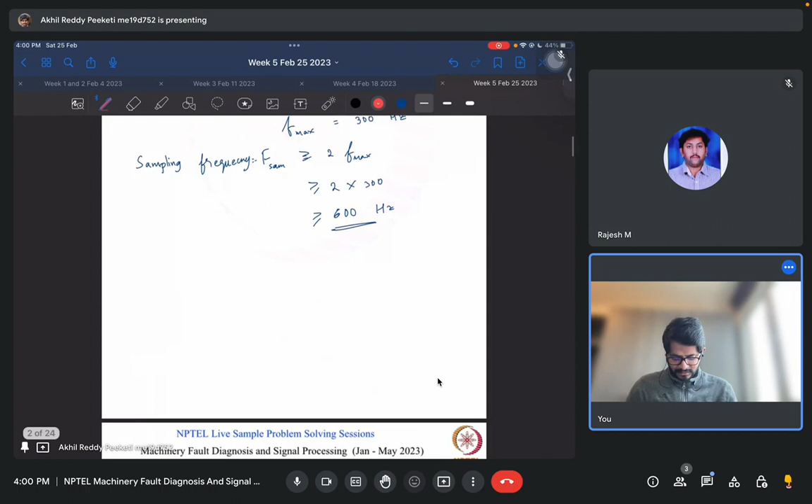So that is twice the maximum frequency. And in the second question, sampling frequency is given, so we need to find the maximum frequency that we can estimate, which is half of the sampling frequency.

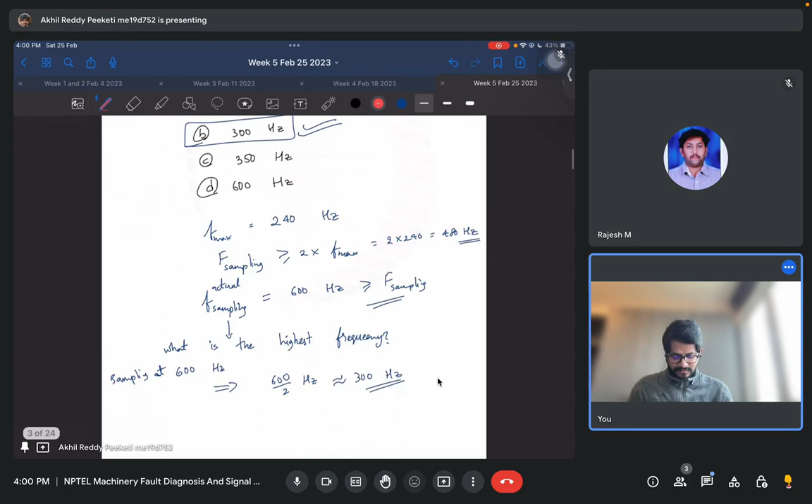And in the next question, we were given the accelerometer acceleration peak and the circular frequency. So from that we actually estimated what should be the amplitudes of displacement and velocity, and the linear frequencies and the RMS amplitudes also, right?

In the next question, we were given the acceleration graph or the signal. From that, we looked at how we can get back the displacement signal and the velocity signal.

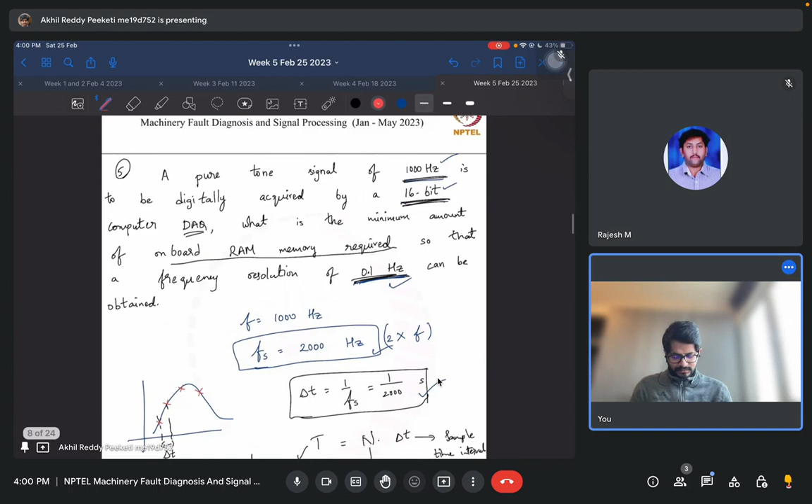And in the next question, we were given the maximum frequency in the signal, the type of storage system, and the frequency resolution, and asked the memory storage. So from the maximum frequency in the signal, we calculated the sampling frequency.

From that, the sampling time interval, and from the frequency resolution we got the total time, and from total time and sampling time interval we got the number of sampling points. From the number of sampling points and the type of storage we got the total bytes needed, and from that the total storage in kilobytes.

Next we looked at what gain is needed if your signal is actually much lower than the resolution of the system. And yeah, a similar question, one more.

And then we looked at the comparison between two different types of storage systems and how one's resolution might be better than the other. And we also looked at how FFTs will be faster than the DFT.

And next we looked at calculating, here we are given the resolution and the type of signal, so from that we got the range, and from range and resolution we got the optimal storage system. So the optimal storage system should be greater than the value of range divided by resolution.

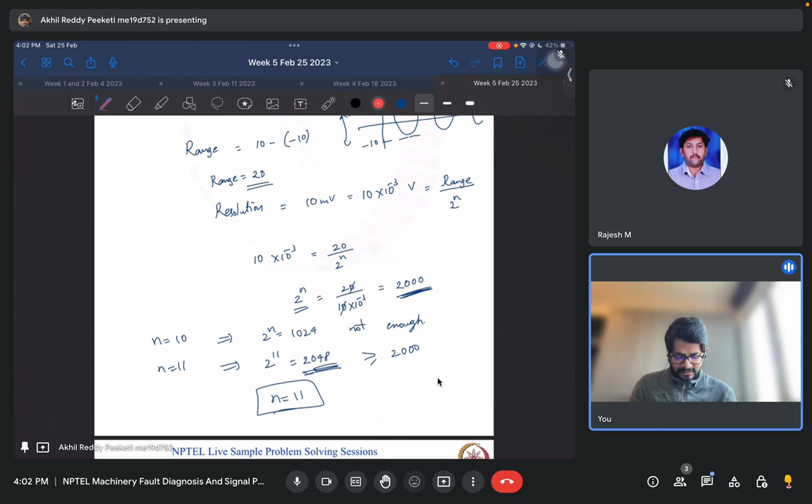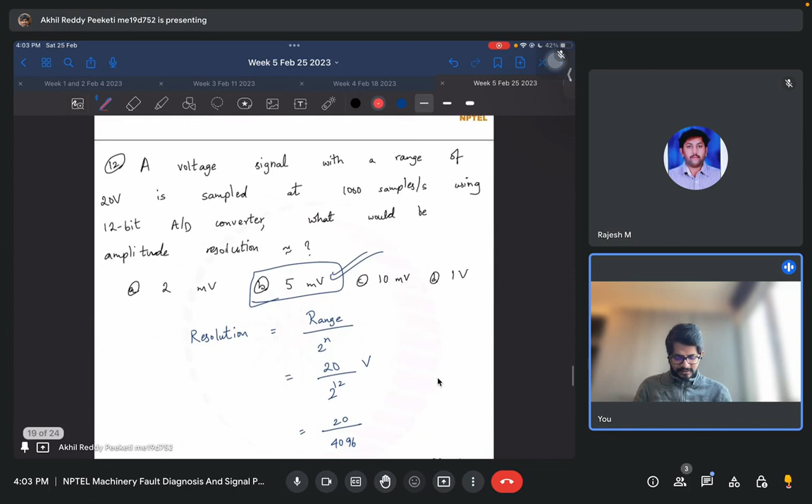And next we have a similar case to get the storage system based on the range and resolution. Next we have the resolution calculated again, and the bit rate, basically based on the number of samples per second and the type of storage, you can estimate the speed you need, basically the bits per second, bit rate.

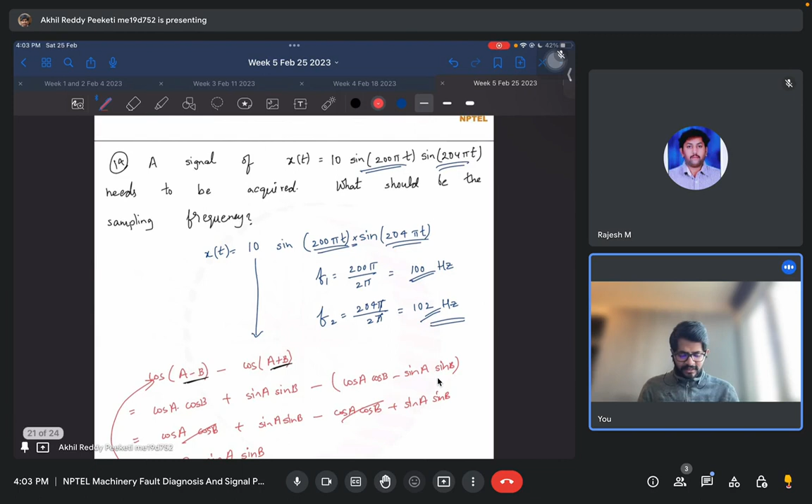Then we saw how, in a case of heterodyne, when two signals are directly multiplied, you can calculate the resultant frequencies, and then what should be the sampling frequency in that case. And in that we have a few more different questions on the same topic, which we solved. Okay, yeah, that's it for today.